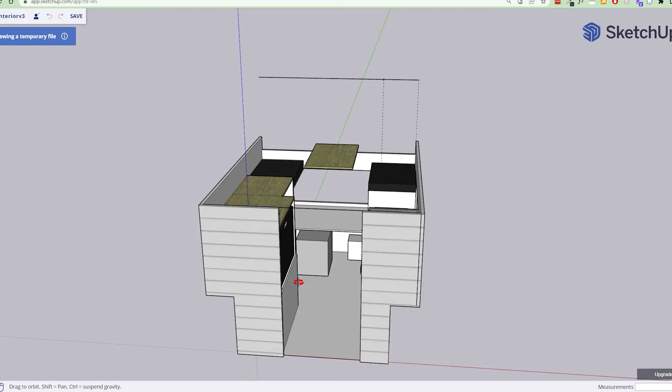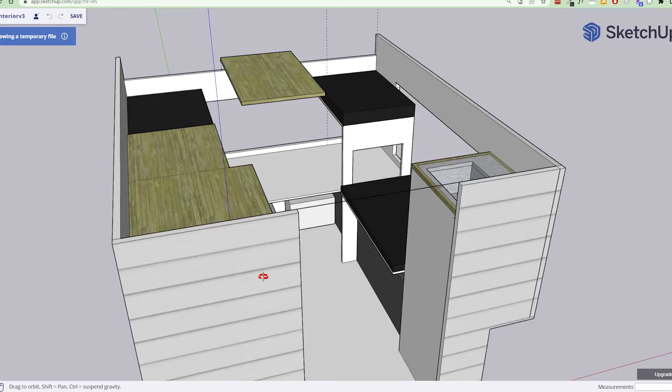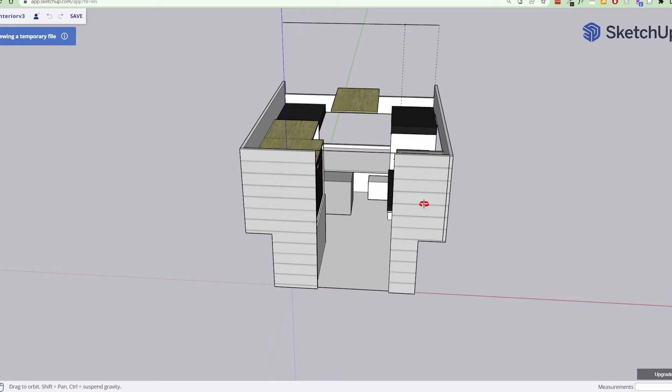Before I even started cutting anything, I downloaded the free version of SketchUp for the 30-day trial and designed the interior of the camper in there to get an idea for what I was going to do. I had a couple thoughts in my head, but ultimately I went with this innovative idea of putting the dinette up higher so your head goes up into the pop-up portion instead of having the dinette down on the floor. This gives me a lot more storage underneath and really opens up the interior. It was super awesome being able to design everything to scale and make sure it was going to fit and work, like the water tanks and the sink. This was a very instrumental piece of the process.

Starting on some interior projects here, the first part of the interior - I have these project panels that are going to be the counter and then a replacement for the dinette table. I already got this one cut down to size and sanded. These look super nice, I think this is going to look really good in there.

We're going to go with a dark stain, but got to cut this one down to size, get it sanded as well. So we went ahead and got these sanded and wiped down. I'm going to go ahead and put the stain on these. I have a dark walnut stain, so really looking forward to seeing how that looks.

After I stained the tables, I didn't actually like the flooring that I picked out, so me and my wife went and picked this out last night. It's super close to the stain of the table and the counter, so just getting it roughed in. We'll cut it down a bit to fit better, and I think I'm going to try and get this installed today. I really like how this looks.

It's going to look super good once we get the wall panels on and everything. This is just vinyl sheet flooring, and the reason I went with this is I didn't want any seams or gaps like if I did plank flooring. That's just a vector for water to get underneath the floor, like the old floor, and do damage. I want a nice solid covering with no gaps for water. Plus this stuff is thin and super light, so it's lighter than plank flooring anyways, and it doesn't take up a bunch of space on the floor.

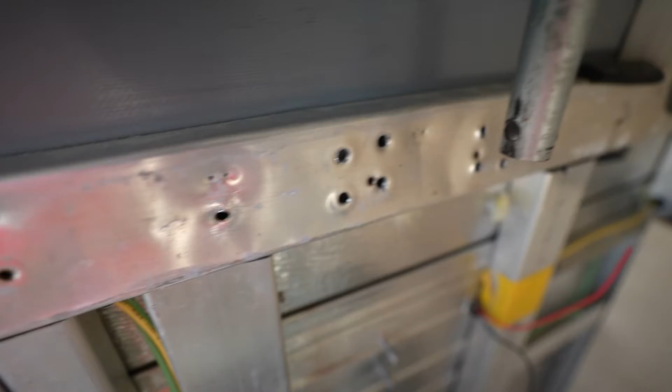Since the previous owner turned this whole back area into Swiss cheese, I got some aluminum bar stock here that we are going to use to strengthen this up. So that's the plan. I'm going to cut this up to 2 pieces to cover the large portion of where I'm going to be mounting my new bases, and add some more strength. So we have the top bar up, and we have these reinforcement plates all mounted.

Now the top bar is up and centered, so we're going to start locating things and positioning stuff. Alright guys, big milestone.

We got our new EMT conduit lift panel in place. This was more challenging than I thought it was going to be, but these 3D printed mounts here are working out great. I need to get some longer bolts because they only go into this 1/8 inch sheet, and I want them to go all the way through into the frame. But man, it all looks really good.

The hardest part was figuring out where this pivot needed to be in order to close it flat without shifting the back forward or backwards. That took a little bit of finagling, but it's in and it's done.

I'm gonna figure something out for holding this up when it's vertical. The struts do a really good job of holding the tent up, and then just locking these in place keeps the poles straight, gives it some structure. Just gotta zip tie it for now, but we'll figure out a more permanent solution probably in a little bit. But yeah, that part is done.

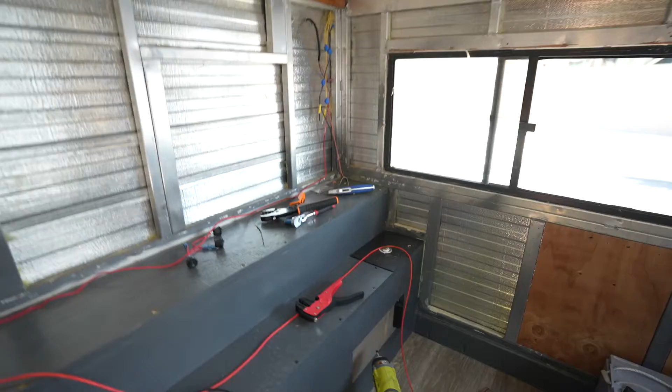So I'm thinking that I'm going to start working on the electrical before we put in the panels permanently. That way I can run the wires I need to run, such as the wires for the lights and other things like that.

So I think that's what I'm going to do, is find a home for the battery, which I believe is right here. This allows me to get in here and get up and get access to this door. So I think that's going to be pretty good right there. That's where we're going to probably put everything.

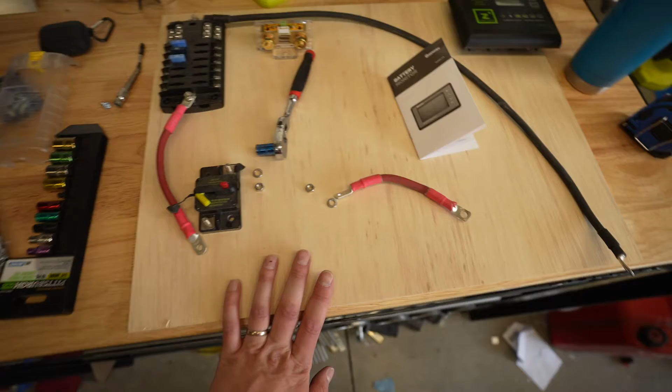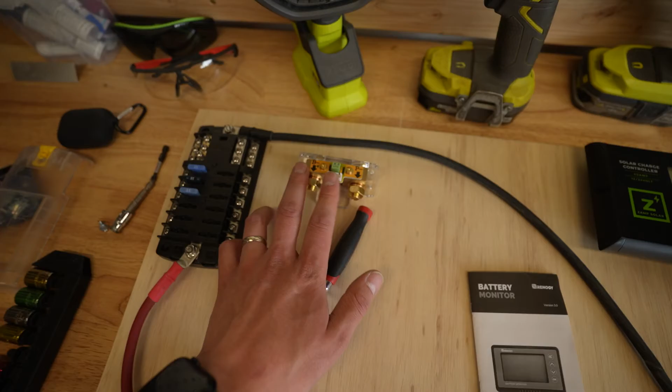So we're going to lay out all of our electronics on this sheet of wood. We have our fuse block here, it's a Blue Sea Systems fuse block. I'm gonna use this Renogy battery monitor, so this is the shunt there, and then we have our Zamp solar controller. We'll have our 40 amp breaker, which is a main disconnect, and any other stuff that we want to put on here.

I'm gonna put it all on this board, because then this board can just be mounted into the camper on the front wall there towards the cab by the battery, and that'll make everything simple, and I can get my runs right and plan out how we're going to run cables off of this, I guess we'll call it the power wall.

Getting this laid out right now, and just doing some research on this, seeing how I might incorporate the solar controller if I can. But yeah, that's what we're working on right now. I'll show you guys once I make some more progress.

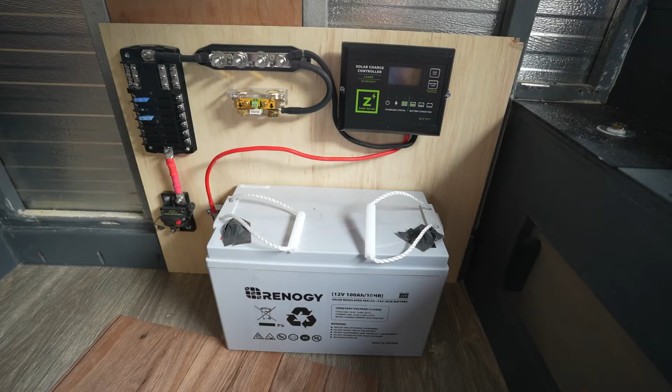So a little update here. This isn't totally the final form, but just kind of mocking things up. Got this kind of mostly sorted where I'm going to have things, and some wire runs. I'm going to likely put this on a piece of 1/2 inch plywood instead of 1/4 inch, just for the screws being too long on a lot of these things.

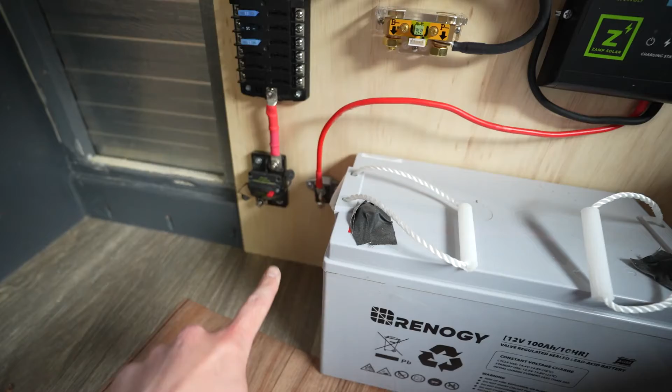But the battery will go right here, and I'm probably going to trim some off the bottom and some off this side in the final product, so it fits a bit tighter and the battery sits closer to some of the stuff. That way it's as compact as I can get it while still having room for everything.

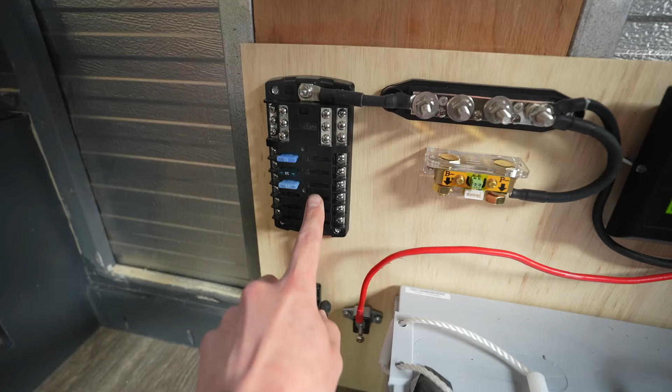But the battery terminal will come off and connect to here for the fuse panel, and then the solar will come up and charge, and then I just have to run a negative to the negative side here, and that is going to be most of it.

I may put a positive side bus bar right here. That way if I want to run an inverter, I can do that as well. But at this point in time, this is probably how it's going to look.

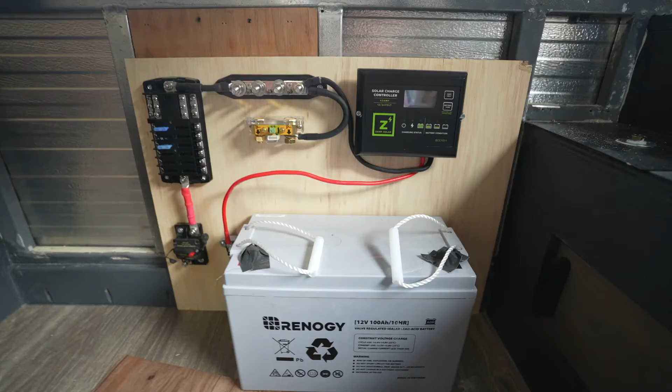And then coming off of this shunt here is going to be the battery monitor, and that's going to come over here somewhere by the counter where I can view it from outside and inside. But yeah, making some progress.

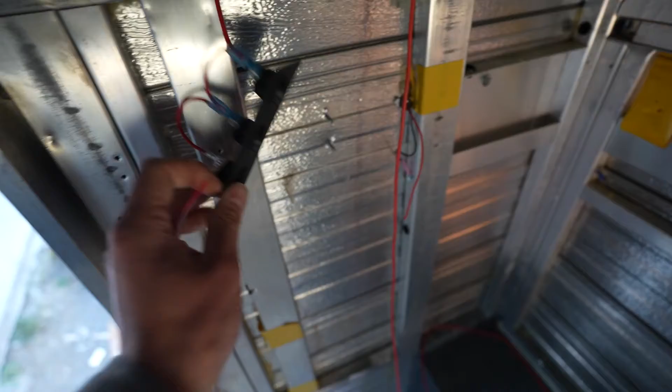So next day I'm wiring in my lights, and what I'm going to do is, this is where my 3 switches are going to go, somewhere right around here for my exterior lights. That way I can get to them from outside of the camper. I'm going to wire them in and use the chassis as a common ground for these, because they're just low voltage, low amperage circuits. I think that should be good.

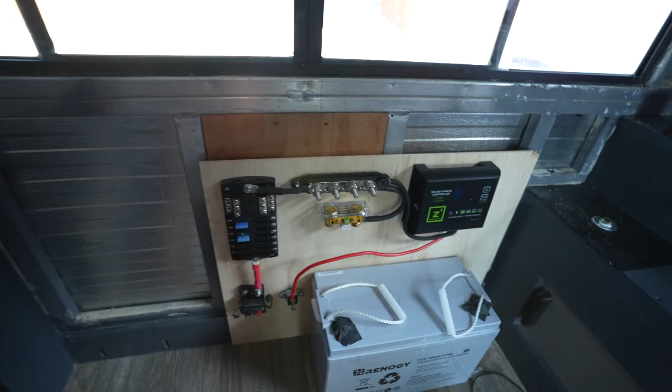So this is grounded to the chassis there, and this one's grounded to the chassis there. That means we just have to run positive wires to it, which saves on having to run a ton of wires through the camper. And then we just have to run a negative ground to the frame from the bus bar here. So yeah, I think that should work pretty good. If you guys think otherwise, let me know in the comments, but that's what we're going to proceed with.

So I'm just drilling some holes where wires are going to pass through the wall. This is the passenger side of the camper, and we have that one light that's about up here on that side. So that wire is going to come down behind the wall, and it's going to pass through here, and then they're all going to be routed along a similar path to the switch.

And then for this one, you can see I did the same thing, but I also added a nice little rubber grommet, so I'll do that for the other one. And then here we'll do the same thing, rubber grommet.

Most of these wires are all going to be hidden behind the other stuff that I'm building in the camper, like cabinets and such, but I didn't want to run too much stuff behind the camper walls, just for ease of use and maintenance in the future. That way all wires are easy to get to, easy to run. If I need to change things in the future, then I can certainly do that.

So our main wire runs in the camper are going to be along this edge here, and then along the top bar there, and then probably along this edge here. And they'll of course be, you know, the cabinets for the counter and the fridge and storage and seating. So all this stuff will be mostly hidden, and anything that is like a vertical piece will have a small cutout in the back here for pass through of cables.

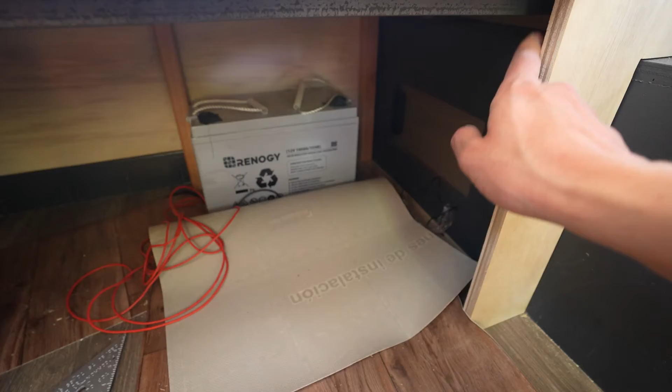Some extra support, but that's pretty strong. I can stand on it, but two people standing on it at the same time might be a stretch, so I'm gonna strengthen it up some more.

This morning I was working on getting this fastened to the wall, so this thing is very firmly bolted in here. It's mounted up here across this bar, and, well, can't see it, but mounted on that one there to the frame, and then I cut this piece here this morning.

So this is drilled all the way through the plywood into the 2x4 that is part of the frame here. And then I haven't mounted this one yet. I'll wait, but I got some pocket holes drilled, and this is mounted here, and this will screw straight into the floor. And then big update—

Got this cabinet, the wood cut for this. This is where the sink's gonna go, counter's gonna go across the top here, sink's gonna sit in here. Then you have a freshwater tank and a gray water tank, so pretty compact. I think that's what we're going to start working on here in a moment, getting that counter cut. Still got to notch this wood to fit around the window frame, but yeah, lots of progress last night.

Pretty happy. So we have our sink here. Just went ahead and put down the measurements on the counter where it's going to be right now. Drilled some holes for the jigsaw, and now we're going to start cutting into this, and hopefully my measurements are right.

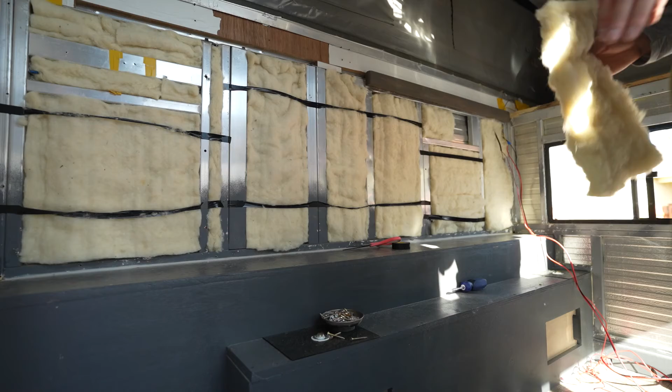Okay, got one little piece left, but I can get it with this. Pretty much covers the entire wall here, and I'm going to go ahead and stick the wall panel on. There isn't anything else I need to do on this side, so sweet.

Small update: have this whole wall done, and the front done, and this wall done, and the back here. We just got to finish up this little side. I'm going to put the wall panel up just to get it out of the way, and probably put the front panel up too. But yeah, we're getting close.

One thing we have to do is this little secondary floor that goes under the dinette. You can see I got the steel painted nice and black. This is all nice in polyurethane, and now we're going to go ahead and put some of the vinyl flooring that I have over there on this as well, so it'll match the floor that's already in there.

Okay, got our vinyl flooring tape on here, and then what we're going to do is position the vinyl flooring on here and start peeling this up and laying it down. Then I have a piece of aluminum trim that will go around this edge here and make it look nice and polished. I'll show you guys what that looks like once I'm done.

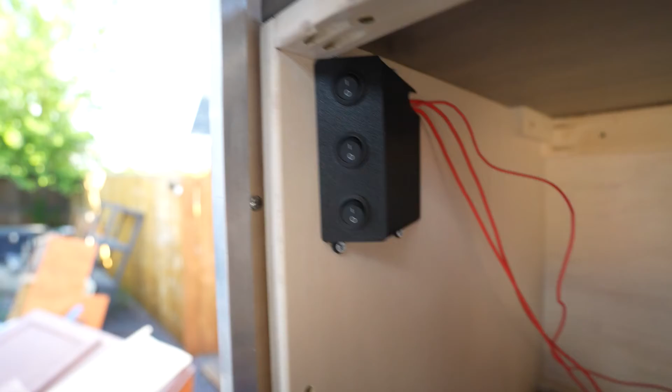At the moment, right now, what I'm working on is this little switch panel that I 3D printed. These are for the outside lights, so I'm just working on routing the wires now and getting stuff situated. The next big thing to tackle on this build is going to be the electrical, which is going to go down here. We'll have our fuse panel and all that stuff on the back wall. Got to secure the battery, of course. But that's what we're working on right now. This is the inside, and it's looking pretty dang good.

Okay, a little update here. So the solar comes through the roof right here. Don't really care for that much—probably will redo this in the future, but for now we have the wire routed over there and then down past the window, so you can still open the window easily, and then it's going to run through here, and that's just some patchwork from cleaning out some water damage and filling this in. But this drops down and then it pops out right here, and now it's got to go through right there because the bed slides right here. So this is going to be tucked up over here out of the way, and the bed will be able to slide without interference, and then it's going to pop into this location here.

So what I did is I just cut this where these join and made this a removable panel, because in order to remove this portion I'd have to take all of this off, take this off, take all the seats out. In the future it's going to be much easier if I have this as a separate panel, and I can make some nice little 3D printed plates to cover up where they join, make it look real nice. But I drilled a hole here at the top because we're going to take the solar cable and run it underneath the back side of this panel where this wire is, pop it out at the bottom so we can then feed it through this hole down here that goes underneath this floor down to where our power is going to be. That's roughly what it's going to look like. So that's what we're working with right now, but gonna probably hang it up here for tonight—gotta eat some dinner and pick this up tomorrow.

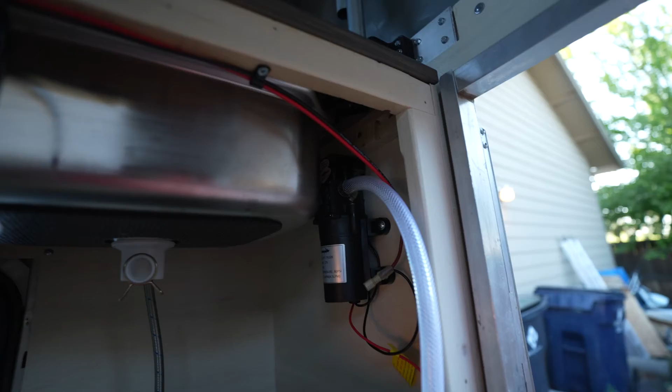Also, I got the water pump mounted in here and wired up for the switch. Tested it, it works good. Starting to get the plumbing sorted out. The water goes in from this way, so it'll suck from the water tank back here, come in and go up to the sink. I still got to find maybe a barbed fitting for the end of this so I can hook this up to it.

I also need to put a T in this somewhere, because I'm going to run a spigot outside, probably to that little spot right there that I patched. That way I have a drain port too for emptying this out in the winter. That's kind of where we're at right now, just getting that sorted. Drain will be easy, just a hose right into a 7-gallon container.

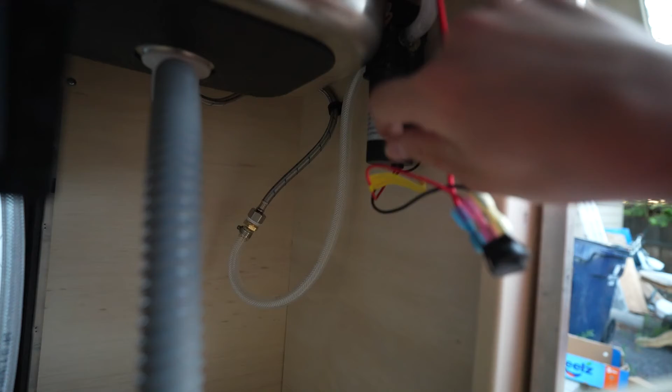So update for tonight, we got the sink all plumbed in. This right here where it drops down, that's where a T is going to eventually go to the outside spigot. I wanted this to be the lowest point between the sink and the pump, so any water that's hanging out can be pumped down and out.

We have the water strainer here as well, which helps catch any debris, keeps them from going to the pump, and then that hose goes down into where the container would be, which will sit up here. Had a funnel here because I was messing around with it trying to get the pump primed. It's supposed to be self-priming, I think it just lost its initial prime.

We will see there. But ran into an issue with the hot side, which I don't have hooked up because I'm not going to have hot water in this. It actually was leaking, so I got to find a way to patch that, or plug it I should say, and then we should be golden on that front.

Moving up here, ended up getting this all mounted up, which is a little USB A and C port, which is quite nice. So that's in a nice little spot. When the bed's all the way out, you can still access the cable if you need to.

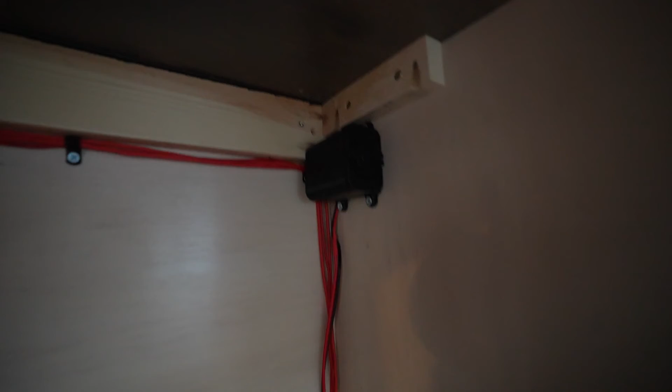Let's see what else we get. Oh, we got this little 3D printed deal here to hold the 12-volt plug for the fridge, which will go in this section here. Obviously the drawer is pulled out right now. I'll show you why that is.

So we went ahead and got these tie downs mounted here, and that's what's going to hold the fridge in place. I just got to find some good straps for that, but that's all squared away as well. So trying to get this ready to potentially use this weekend, but we will see.

Alright, so I got a big update for you guys. I've just been plugging away, working, getting stuff done. Haven't stopped to film a ton because I've been super short on time, and I'm trying to get out today and take this thing camping for the first time. So just been buttoning up a lot of little loose ends that I need to get finished, so this thing is ready to take out. Certainly not 100% dialed, but it will be in a state good enough to use. So let me show you guys what I've been up to.

Right, so we got cushions in this baby. It's nice 4-inch thick foam. Picked it up from a place called Joann's, like a chain fabric store. So got those in here.

These are just some patio furniture covers off of Amazon, and then we got a little 2-cushion deal going on here. These are super comfortable. The foam was ridiculously expensive. Good thing it was 40% off, because it's like $65 after being 40% off for all this foam. So yeah, cushions are in, everything's feeling awesome.

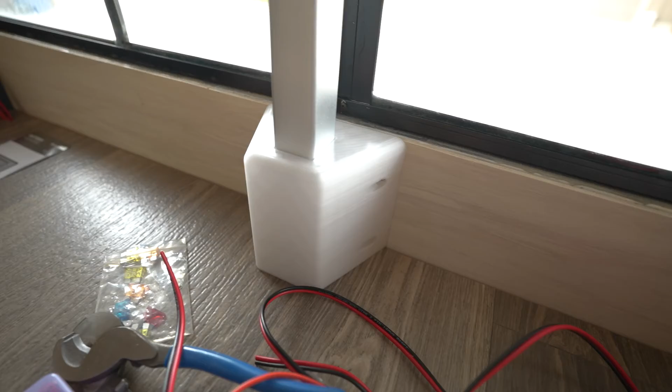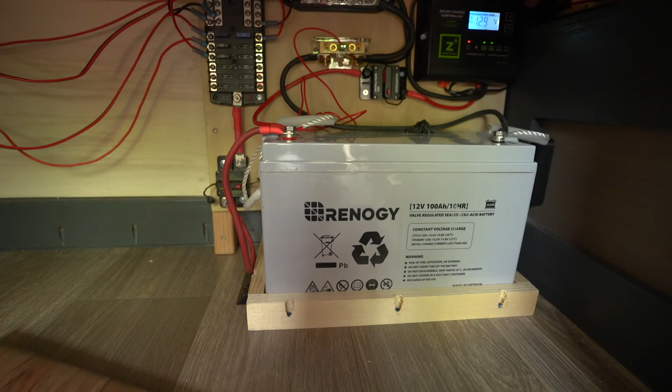And I think I showed you guys this little 3D printed stabilizer here, but that's all mounted and super sturdy. Moving on down to the electrical side of things, I got the battery secured in place. That's not going anywhere. I just got to tidy up some wires under here, do some cleaning up, and it'll be good for now.

So yeah, that's accomplished. And then moving over here, this is really exciting. I got the sink functioning. Oh yeah. She's got some pressure too. So that functions. I'm just running some bleach water through the whole system right now to try and clean it up. But it even will do a little tiny trickle, which is awesome.

So pump's all mounted, and then the switch to control it is there. And then got this all mounted up as well. Under here you can see how we have everything sorted. So that is the gray water tank, and up there is the regular fresh water. I gotta mount some deals to keep these two containers in place. So that's one thing I gotta do.

And then fridge is in and secured. It's not... let me see there. It's not anything super pretty at the moment. Got a bunch of extra strap, but it's in there nice and secure. Should be perfect. And it's powered on right now, cooling down. So that is awesome.

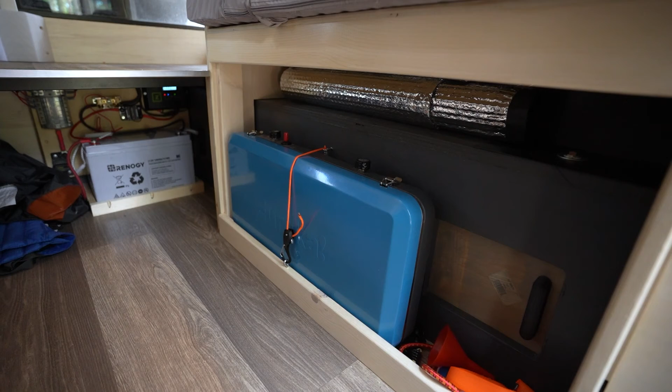Now, I'm super happy with how everything turned out in here. It's kind of better than I could have expected. It feels really polished and functional. Lots of storage, lots of little nooks and crannies to kind of stash things, which is awesome. I'm not sure how much more I'm going to do in terms of permanent storage changes. I kind of like having a lot of the open spaces in here to just stick stuff, get stuff out of the way. So we'll see as we use it more, but super happy with my first time out in it, and how everything feels and functions is awesome.

Fridge works well, sink works great, having the battery monitor is awesome, and the dinette where it's at is great as well. So just really happy with how everything turned out, and it's kind of exceeded my expectations.

Well, that really concludes this build series on the camper. Any of the upcoming videos on this are probably going to be smaller, more focused on specific things like redoing the ceiling or putting in the heater, things like that. I may even combine them into one video depending on how long the things take me. But as far as major build milestones, I'd say this series is largely complete for now.

Really happy with where everything's at, and just looking forward to getting outside and being able to use this now. A lot of little tiny tweaks, things like mounting paper towels and soap dispenser and little hooks and organization things here and there that I'm going to add, but largely it's really functional. It's working really well, and I am just super stoked with how it has come out.